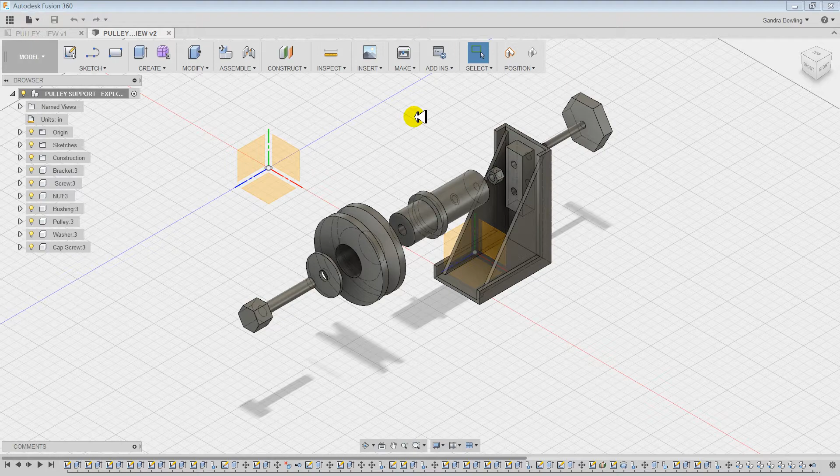From this base file, I'm going to create each individual piece with dimensions. I'll go from this drawing file, go to new drawing from design, leave everything as is with full assembly, and click OK.

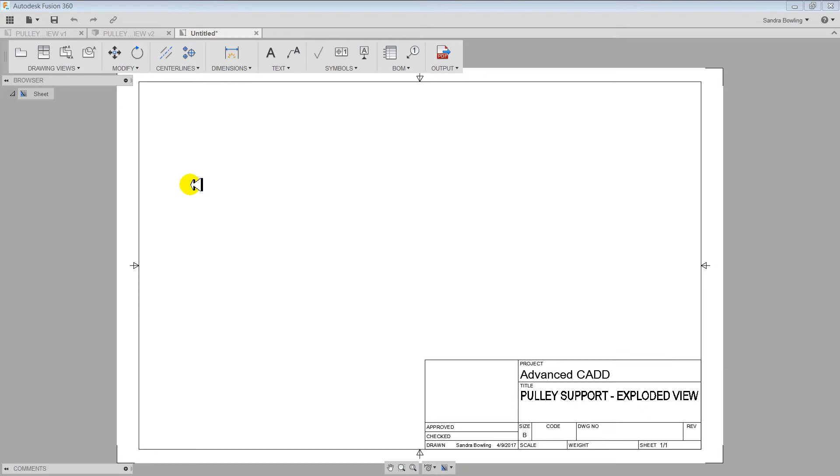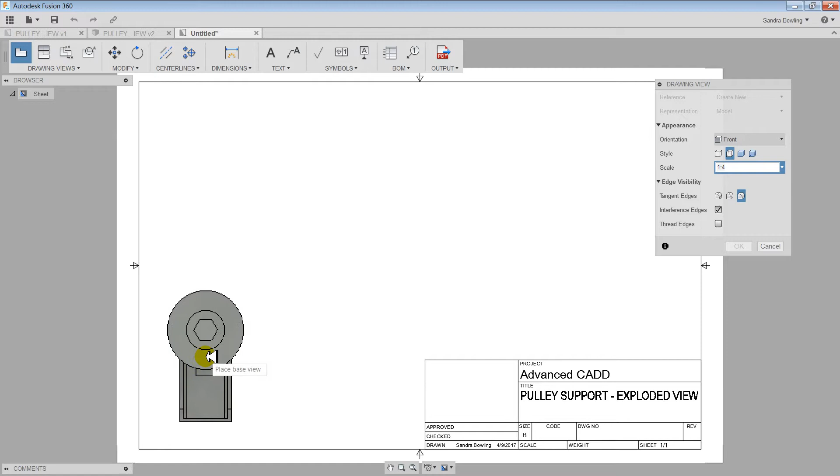From there, I'm going to set the front, visible and hidden edges. I'm going to do 1/4 and pick a point right here.

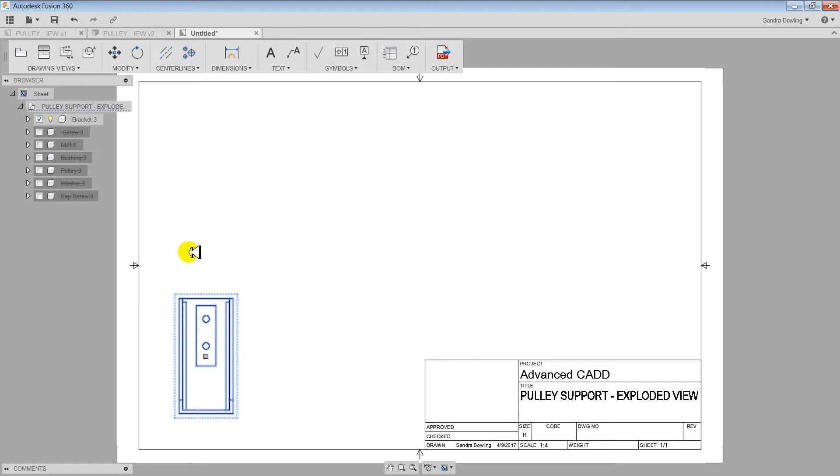I'll start here, then go OK, and turn off all of these objects. Now I'm going to right-click and project this view to the side and to the top, then click Enter.

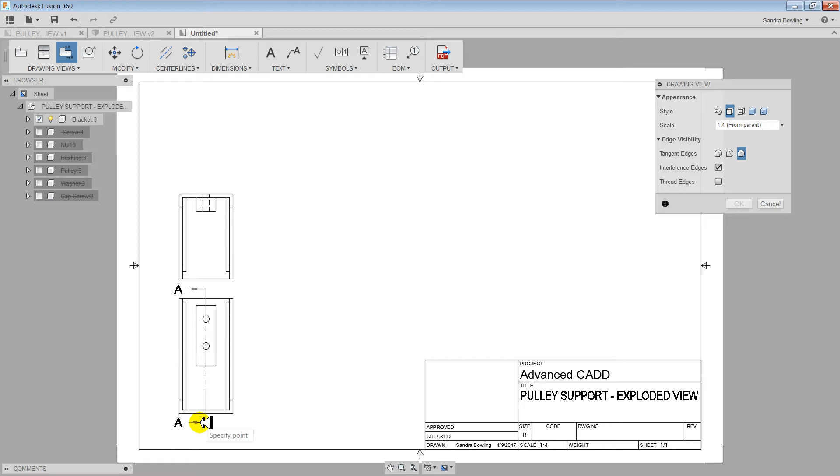Now I can delete that one, and click on this one to do a section view of it. Pick here to here, hit Enter, and pull it over to the side, then hit Enter.

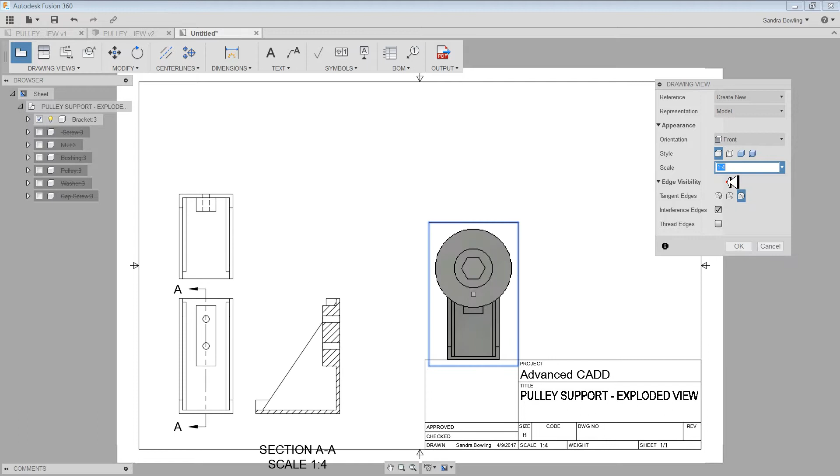I could do another base view, and on this one again it's going to be the front, at 1/4. So maybe I turn off these, right-click, projected view, out to the side, and Enter.

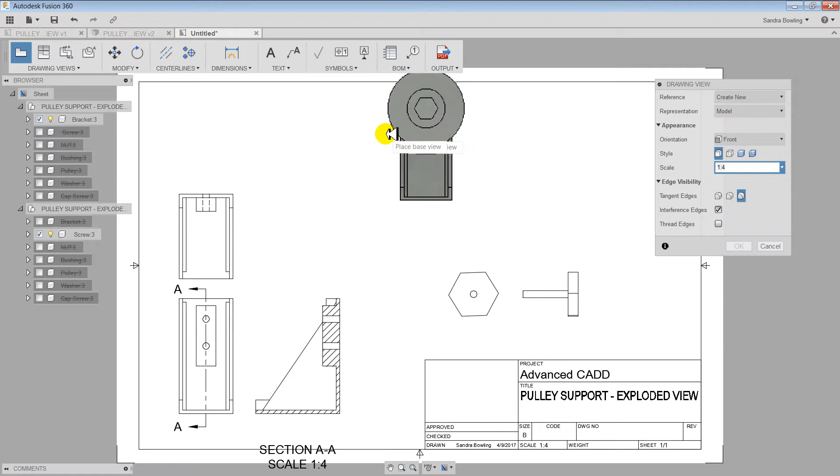I do a base view drawing again, change it from 1/4, pick a point, click OK, and turn off these, and use the bushing.

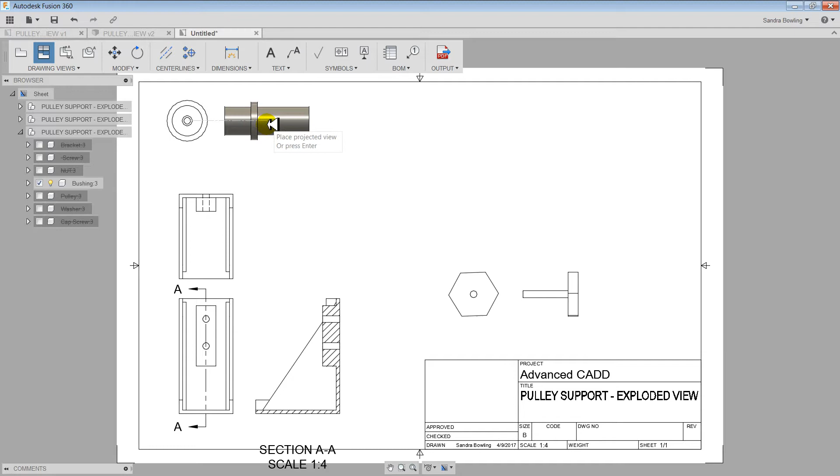I'm going to collapse this to give myself some room, bring this up to the top, and project that. You can use these buttons up here at the top too.

Project that, hit Enter. Now on this one, right-click, Edit View. All of these should be hidden with hidden lines, then close. Edit View, hidden lines, close.

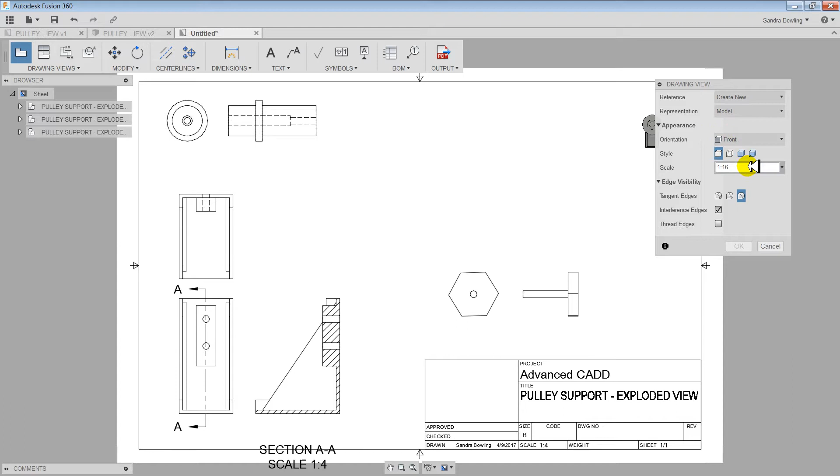I'm going to create another one: Project, base view, front, hidden, 1/4, pick a point, OK, turn off that.

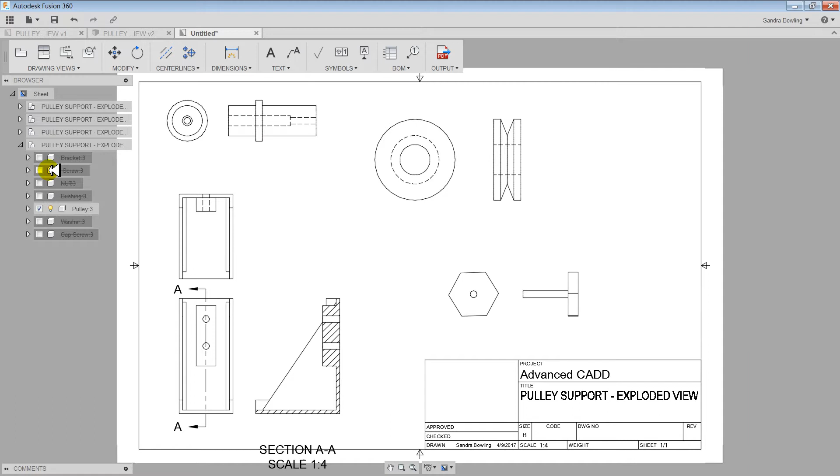Project to the side, Enter. I can do it one more time. Base view, front, pick a point, OK, edit view. Should be 1/4, close, and I've got to do the cap screw and the washer.

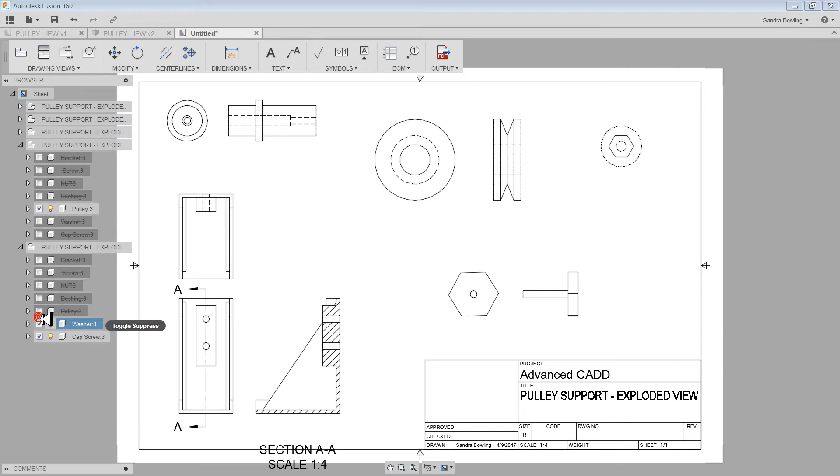You can do projected, out to the side. Can move these, move this down and over. Let's put that here, put that one here. Move that down a little bit.

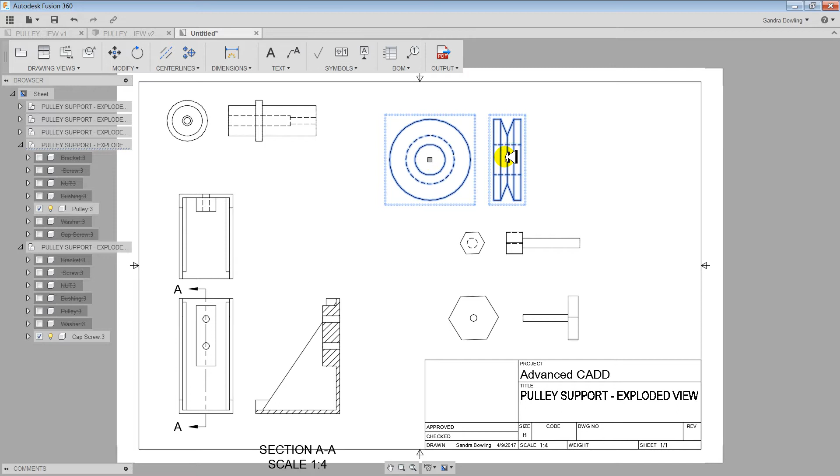Shift, and you can push these over. There we go, drag that back over here. All right, so now you can start dimensioning the object.

The dimensioning of the object is the same as it is in regular CAD. Click on Dimensions. You can click on, for example, this length here. I'll do it from the top. You can go from endpoint, that snaps, pull it across.

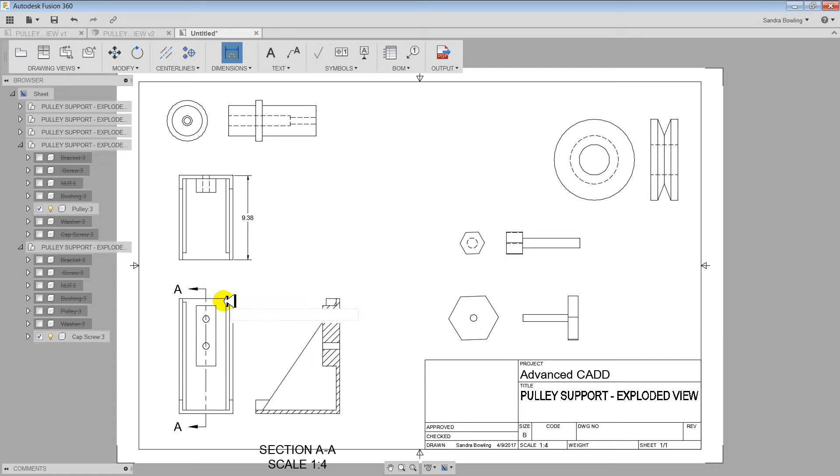You can do it from an actual edge to edge, endpoint to endpoint.

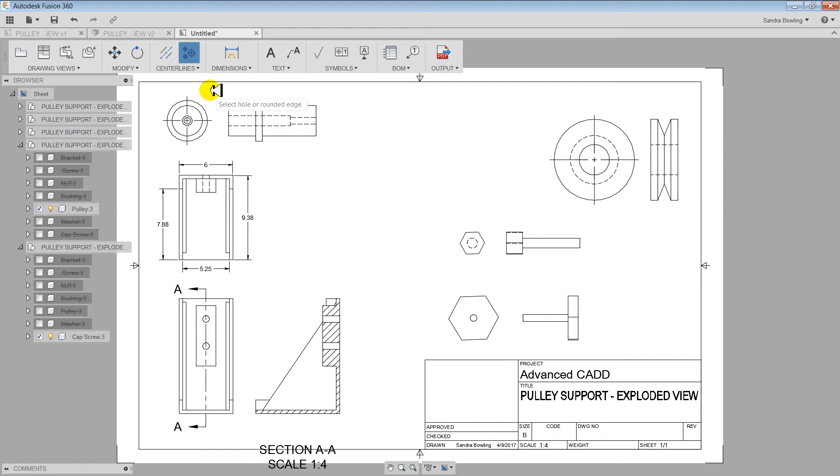You can also do dimensioning based on center lines. Let's say you needed a center line from, or a center mark from here, maybe one out here, maybe you need center lines, and you have to pick the first edge from here.

I'm going to undo that one. So my center mark would be from, oh, I guess you'd have to go from edge to edge, edge to edge. It might be easier. I'm going to go ahead and delete that one. Click on the line and then pull it.

You've also got dimensions like angular, so I could click on angles within here. I'm not able to select this one. Well, angular - since this is a section, I don't believe it's doing it.

So I'm going to do, we can do diameter, and pull this over. Again, you can do aligned from endpoint to endpoint.

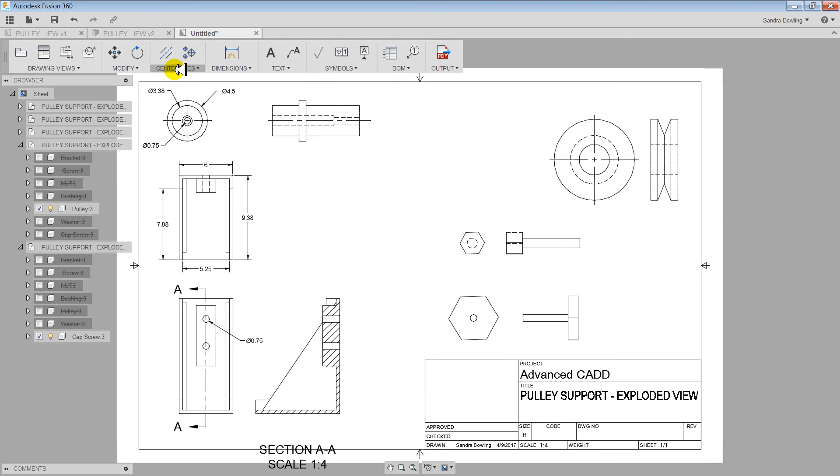We don't typically use aligned though in this class. You can do your, if it had a fillet or a radius - oh, here we go. We can do angular over here from that edge to that edge. We can do dimensions from here to here.

Okay, so I'm going to stop here and you can go ahead and start doing dimensions on this.

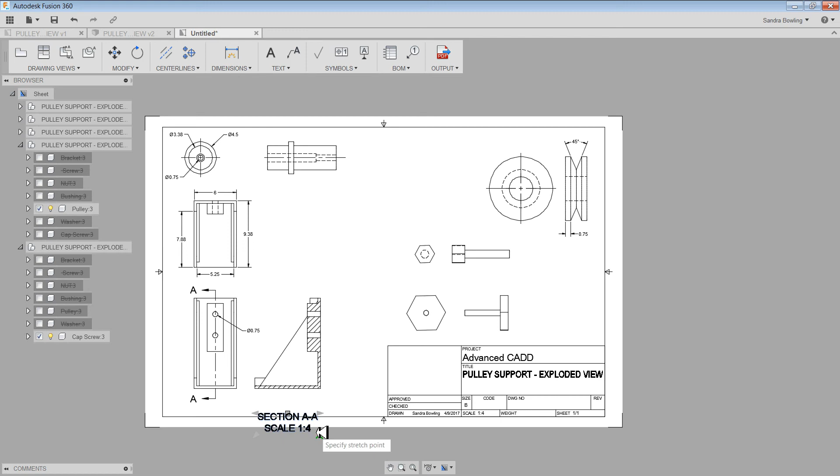The other thing you can do is adjust your pulley, or adjust your title block with the information. You can just say exploded view instead of exploded view - details, we'll call it parts details. Click OK. You can add text.

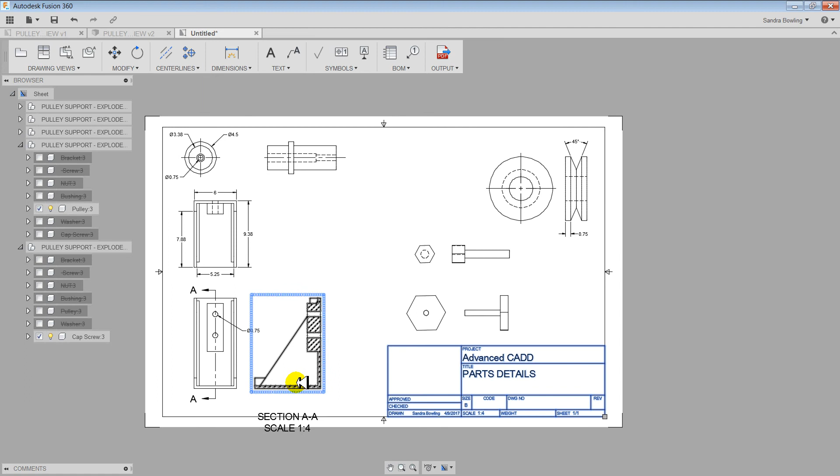Now you can also adjust your text height. You can highlight that, change the height here, and close. Apparently this doesn't allow you to change it.

Okay, but you can add text like this is 1, bracket. Highlight it, and change the text size here. Maybe it needs to be - that's too big, so we'll go back to 0.12.

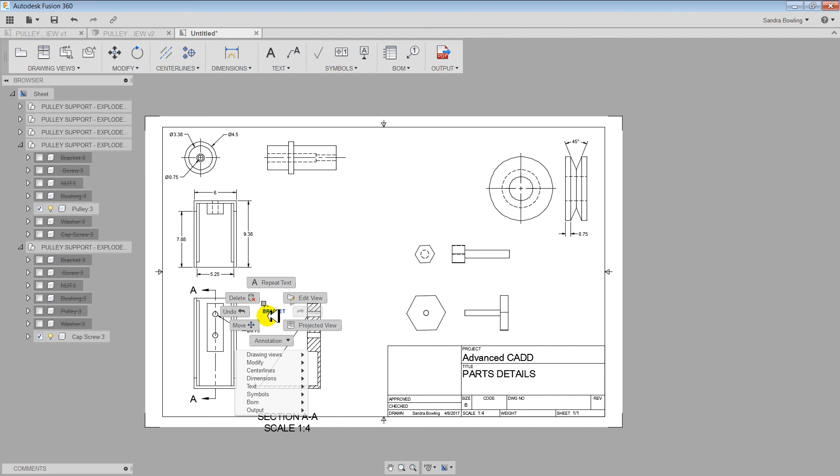Different styles, you can add symbols. Trying to get that to move. Now, pull this out a little bit.

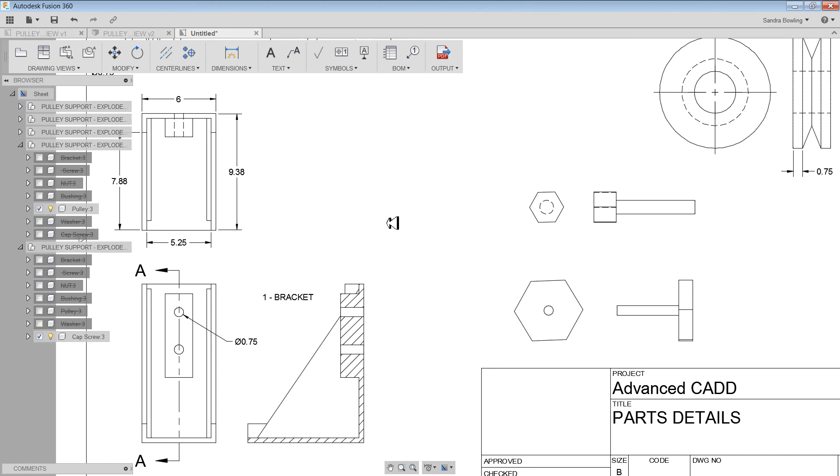It's not as user-friendly as regular AutoCAD is, but here's some ways to start laying out and dimensioning your objects. All right, that's it for now.